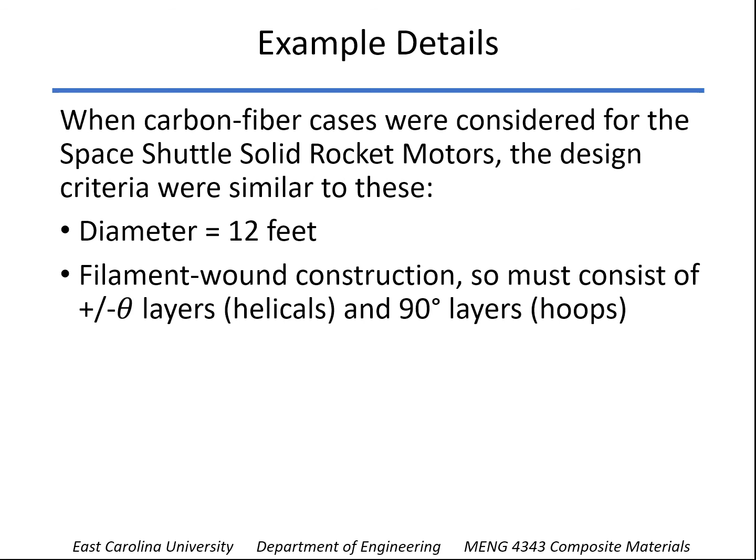The operating internal pressure was about 1,000 psi. Each one of the motors generated a thrust of 3 million pounds. We'll see how that plays into our design requirements in just a minute.

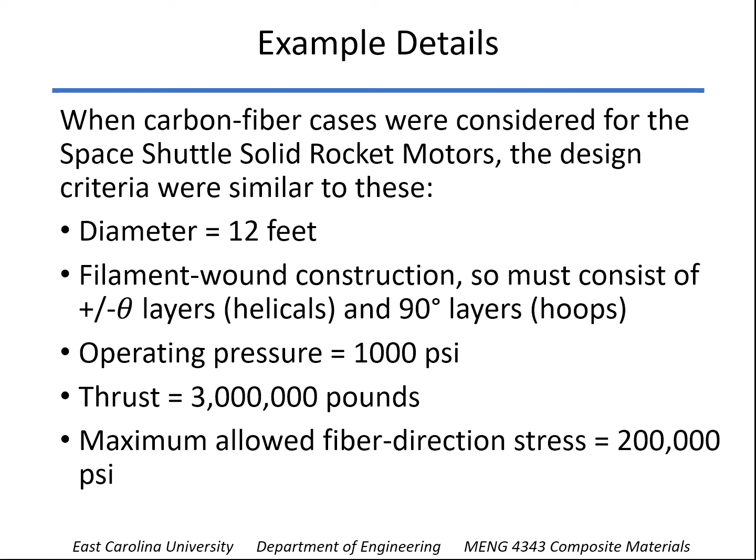And we used a maximum stress criterion, so the maximum stress in the fiber direction, that is sigma 1, was limited to 200,000 psi. That was the strength downgraded by a factor of safety of 1.4. Aerospace products tend to have a much lower factor of safety than most industrial products because you can do a lot of testing and verification.

So over the 125-foot length between the connection points, the steel cases grew about 0.6 of an inch, and that was to be matched with the carbon epoxy case so that it didn't have to totally redesign the connection methods.

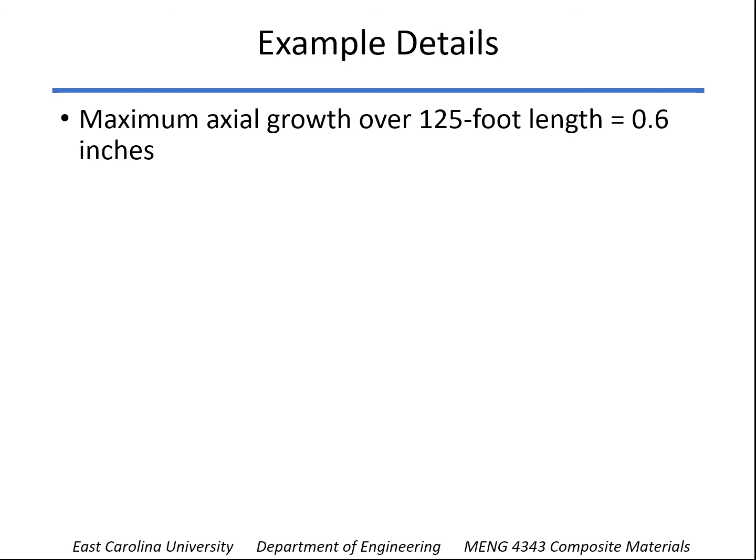And there was a minimum value of stiffness, stiffness being the modulus in the axial direction times thickness. 10 million pounds per inch was the requirement for that. That's like a spring stiffness, and so the idea was that you wanted the response of the case to be similar to that of the steel case, such that the impact on the total system was really negligible.

So we've got a little video we can go to here. And have to go back to this one.

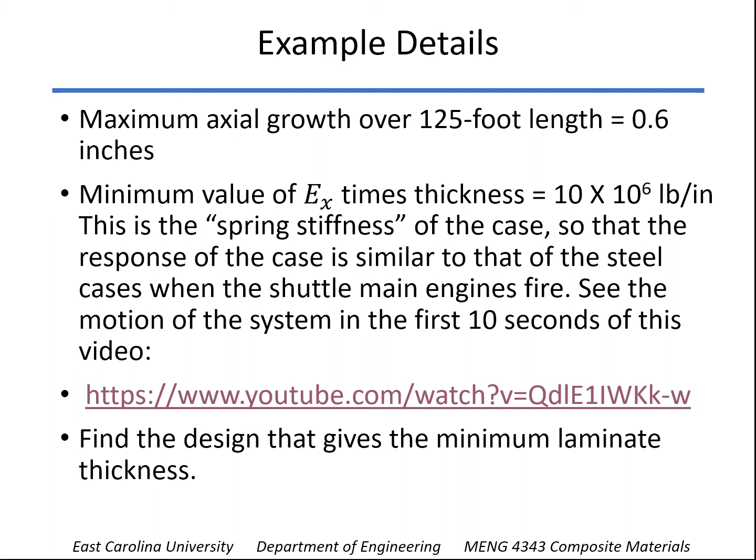Okay, so what we're trying to do, of course, is to minimize the weight, therefore find the minimum laminate thickness. All right, so as we said, the diameter was 12 feet, so radius of 6 feet or 72 inches.

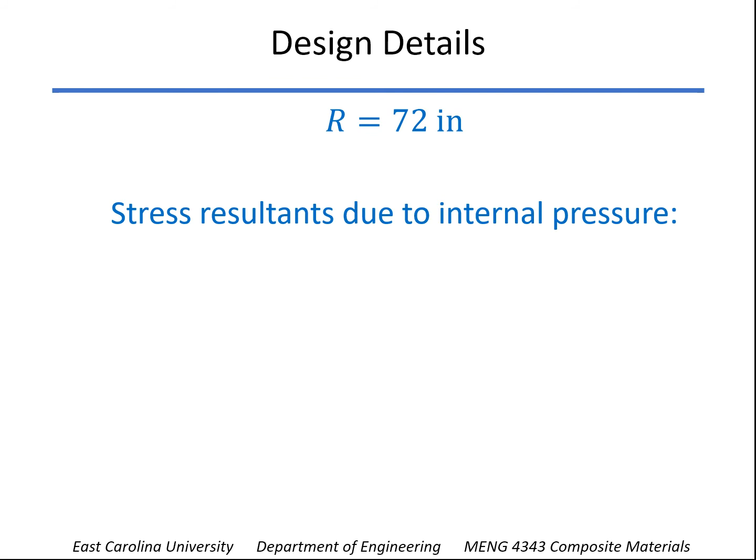And we earlier found out how to find the stress resultants of a cylindrical pressure vessel, PR in the hoop direction, and PR over 2 in the axial direction.

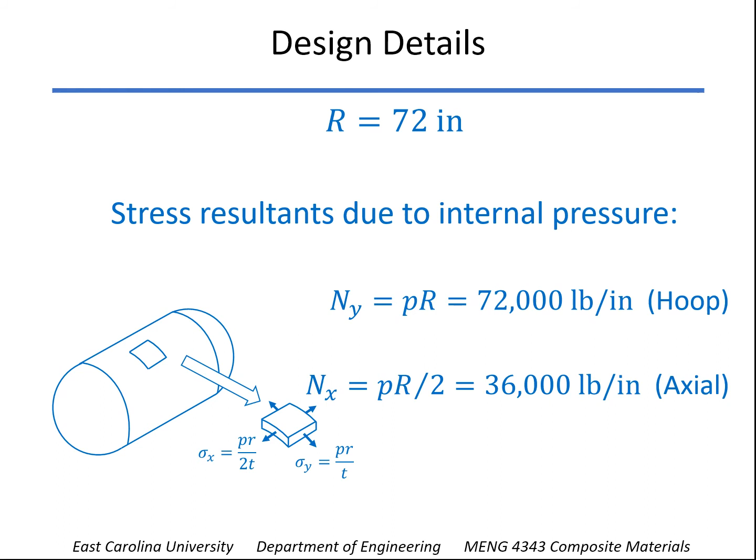And so if we take that compressive load of 3 million pounds and divide it by the circumference of the case wall, pi times the diameter, it ends up being 6,600 pounds per inch compressive. That gets added to the tensile load due to pressure, and so we come up with a total axial stress resultant of 29,000 and some pounds per inch.

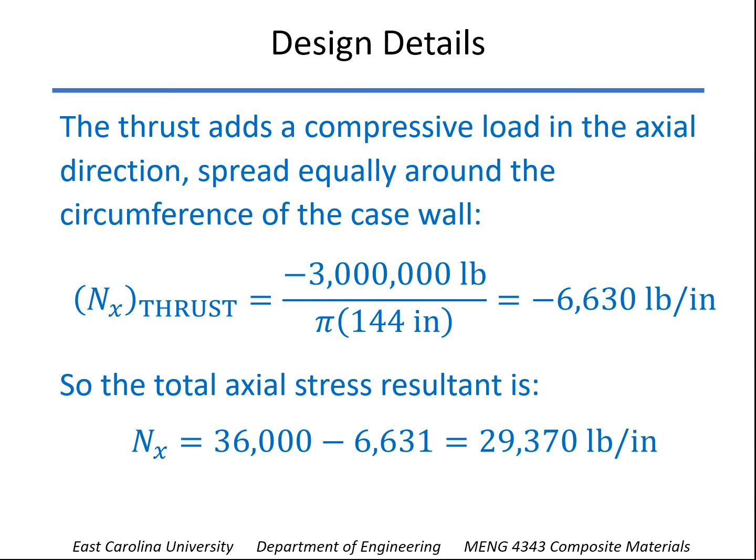Now we also look at the axial growth requirement and just say, well, if we take the total length between the two connection points and look at the allowable change in length, that gives us a strain of 0.0004, or 0.04% strain.

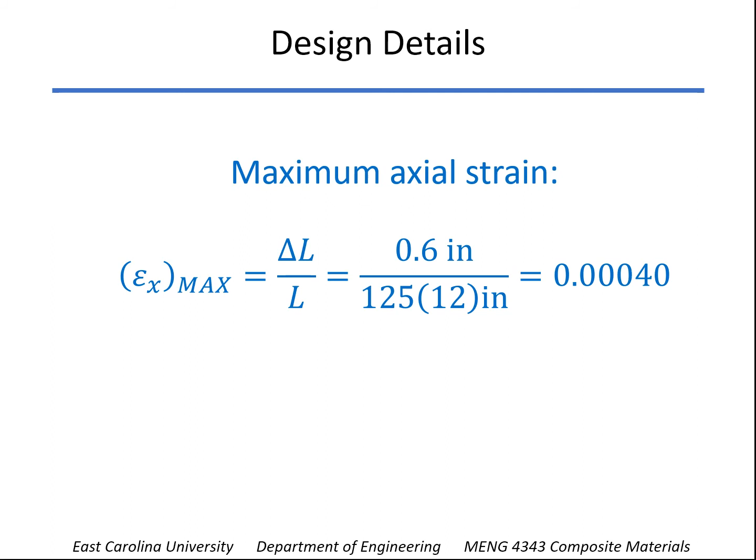And so how are we going to approach this? Well, starting point, you would think that both the axial stiffness and the axial growth would be similar requirements. That is, if I can get high stiffness in the axial direction, that ought to be the best design.

Now, winding is hard to do at angles less than about 10 degrees, so let's try that. Let's try theta being 10 degrees. And so what we're going to do in Solver is we're going to try to minimize the total thickness.

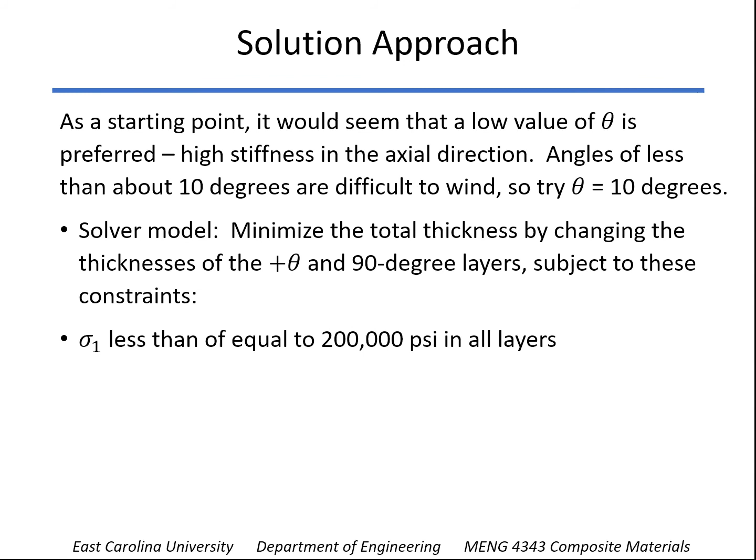We're going to change two thicknesses, that is the plus theta and the 90-degree layers, making sure that the fiber direction stress is less than or equal to 200,000 psi in all the layers. The total axial strain less than 0.0004, and our stiffness value greater than or equal to 10 million pounds per inch.

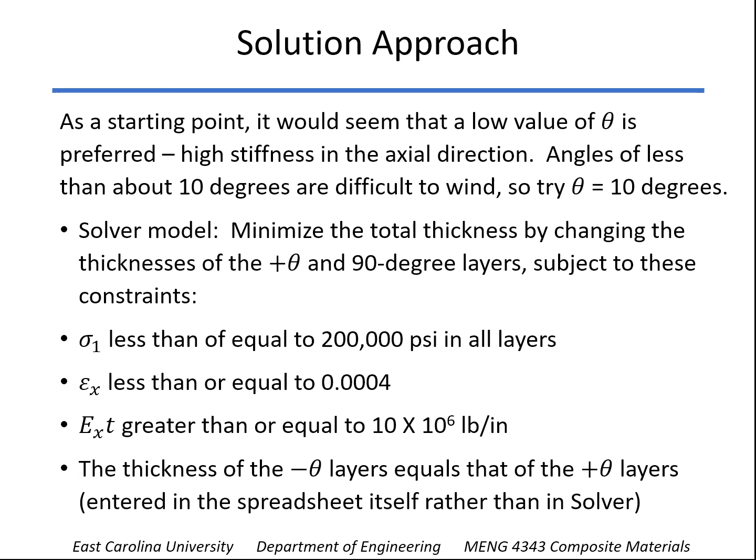Now, one thing we'll put in the spreadsheet is that, again, it has to be a balanced laminate, so the thickness of the minus theta layer has to equal the thickness of the plus theta layer. In other words, our 10 and minus 10 here. And let's set that up in Solver.

Okay, so I've just arbitrarily put in a half inch across here. I want to make sure that this thickness is equal to that one, because these are going to be the two that we're going to change, the plus 10 and the 90s. Here's our loading shown here, n sub x and n sub y.

Now what I've done is made a couple of cells over here. This is the axial modulus times the thickness. That's the number that has to be greater than or equal to 10 million. So you can see this design's way over that. But this axial strain, I've just copied from where we've calculated the strain down here. That has to be less than 0.0004. So the design that I've got here is not going to work.

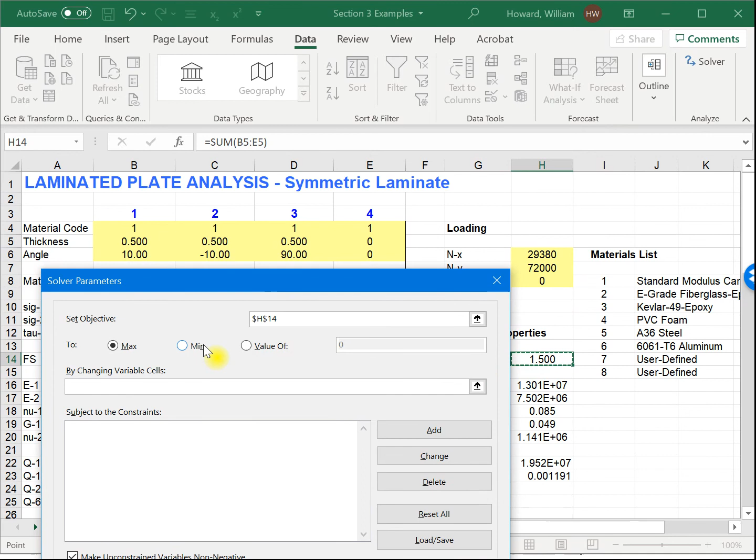Let's set this up in Solver. Remember, this is what I'm going to minimize, this total thickness. I'm going to change the thickness of the plus 10s and the thickness of the 90s. And I have some constraints.

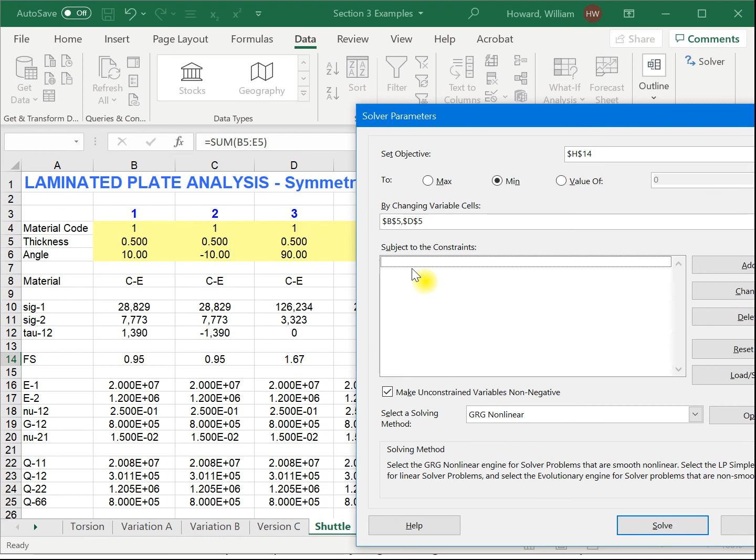Sigma 1 for all three layers, and again, ignore layer 4, it's got a 0 thickness on it here. This has to be less than 200,000 psi. Another constraint is that this axial stiffness value has to be greater than or equal to 10 million. And finally, this axial strain has to be less than or equal to 0.0004. Click OK, and let's try to solve.

And you see what we come up with is a thickness of over 2 inches. You can see that we just hit the strain here, but we're way over designed as far as the axial stiffness goes. So the strain seems to be the driving factor here, the critical factor.

Okay, so again, there's that with theta being 10 degrees. And also we found that the stresses in the plus and minus 10 are relatively low. The 90s are at their limit of 200,000 psi. So again, axial growth appears to be critical.

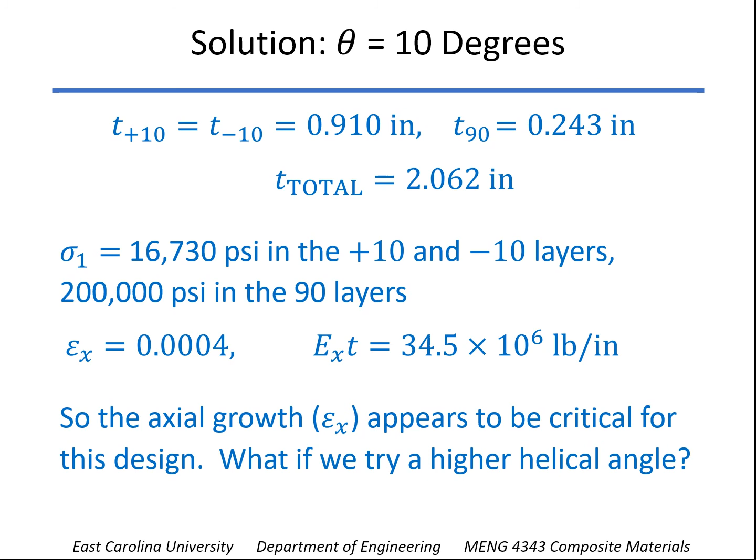Now, what if we just try a higher helical angle? That doesn't seem logical necessarily, because you've got two things in the axial direction, stiffness and growth. But let's try it anyway. So we're going to switch to 30 degrees. I'm just going to change the 10 to 30. And again, we've got plus and minus 30 here. All the constraints are the same, so we can just run it again.

Oh, look what we come up with, a little over 1 inch thickness. So definitely a better design here. Let's go back and again summarize that design.

Looking at the stresses, nothing significant there, but notice that the axial strain here is actually negative in this case. So with 30 degrees, the stiffness became critical, and not the axial growth.

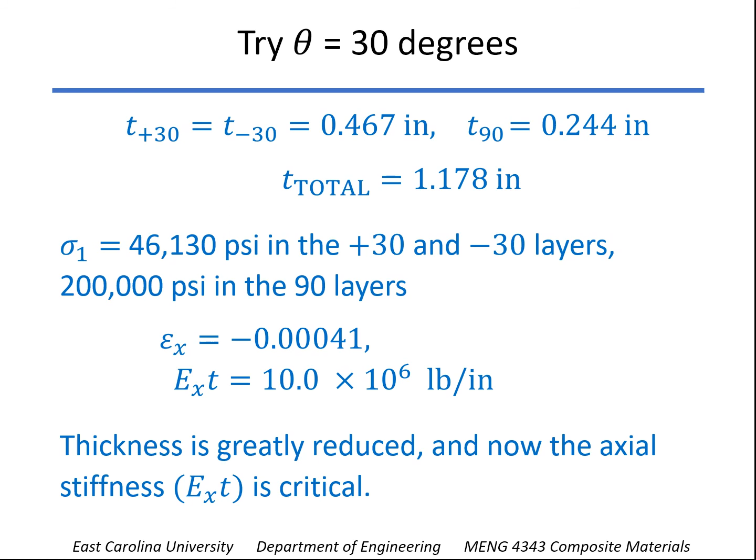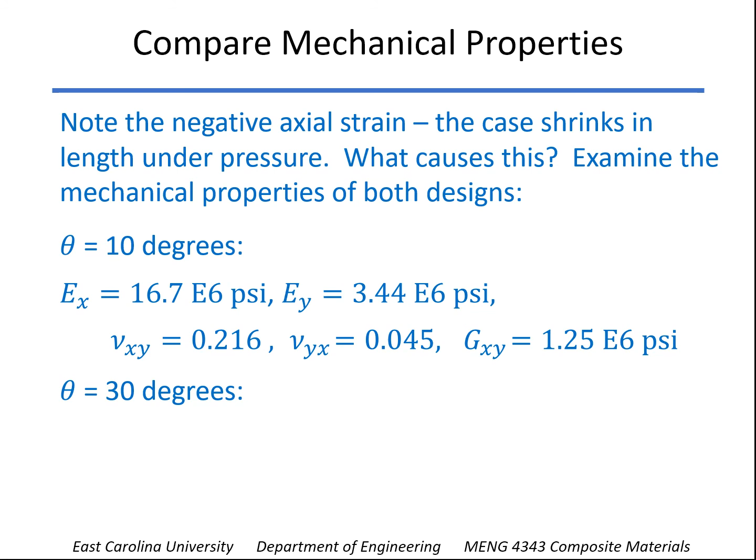So before we look at trying to optimize and say, well, what's the best angle, let's take a look at the mechanical properties of both the plus minus 10 and plus minus 30 designs we've come up with. Here we go for the plus minus 10. Here we go for the plus and minus 30 degree. And the key is this value right here, the Poisson's ratio yx.

So when you have the higher angles, you get a Poisson's ratio that's greater, and what that causes is that as the case stretches in the hoop direction, it causes contraction in the axial direction, and it's much greater for the 30 degree than it is for the 10 degree.

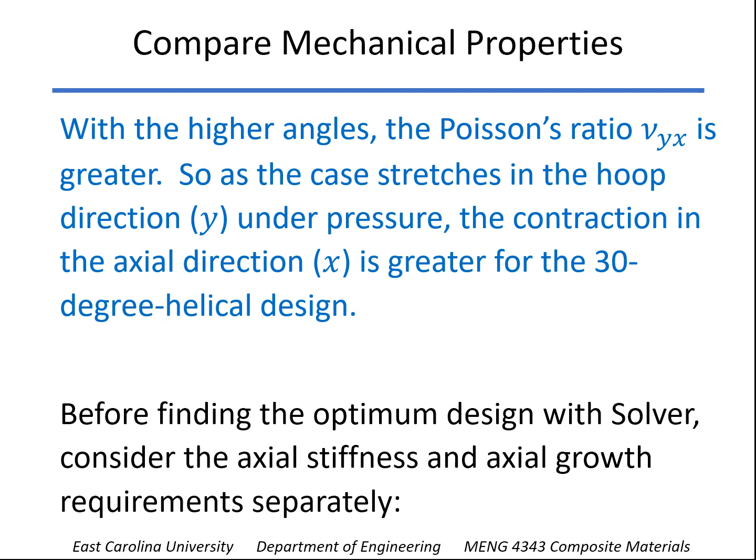And we can look at the optimum angle here in just a moment, but first let's just look and see if we look at the axial stiffness and axial growth requirements separately instead of at the same time. You can see if we design for axial stiffness, obviously the lightest weight case we're going to have is as close as we can get to a helical angle of 0, and as we increase the angle, the stiffness goes down, so the required thickness goes way up.

But when we look at the requirement for axial strain, just the opposite. You can see at 10 degrees we had to be over 2 inches, but at 30 degrees then the axial stiffness becomes critical, and so our design had to be up there. So the best design was where those two cross. At about 27 degrees, that's going to be the optimum angle. It's going to be a little over 1 inch.

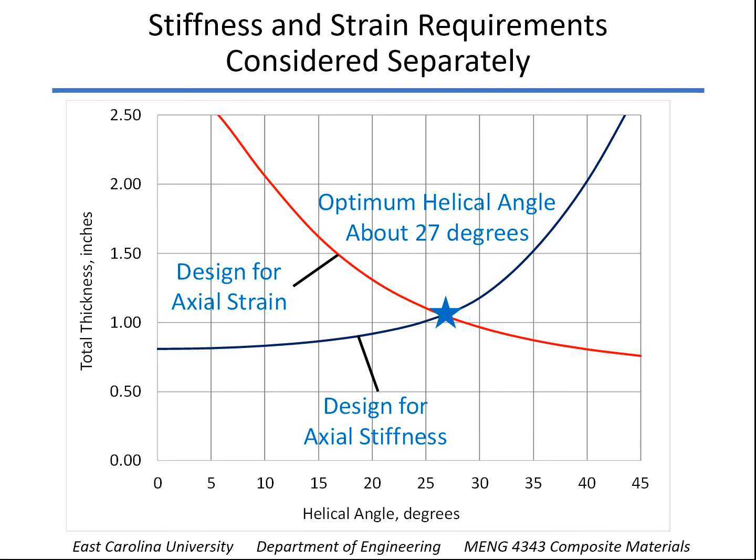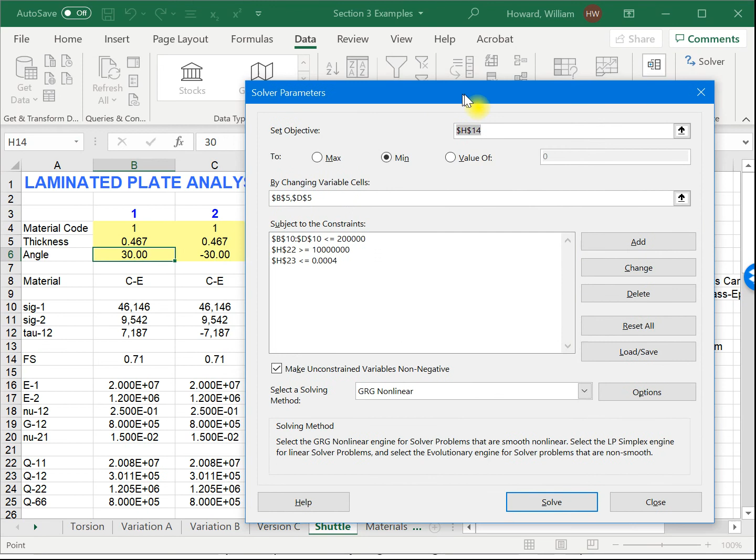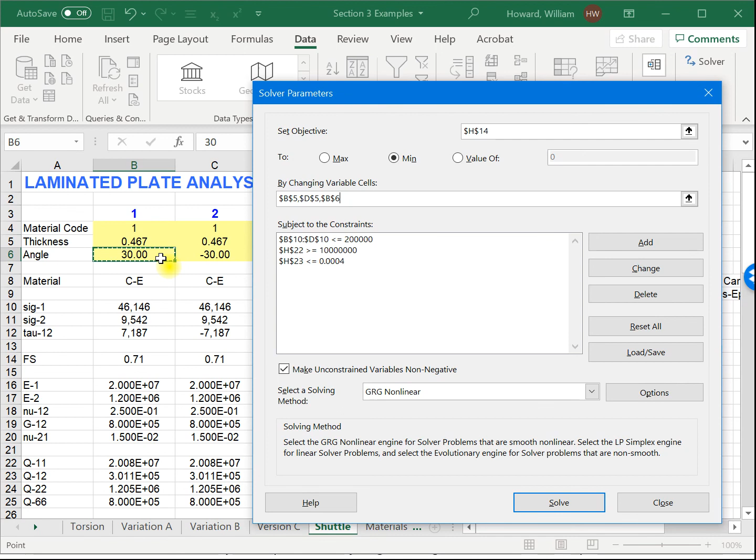So back to the spreadsheet. Really all we have to do now, and remember this cell is set to be the negative of that cell, so all we have to change in Solver is allow one more variable. We're going to let both the thickness of the plus theta, the thickness of the 90, and the angle theta itself to vary.

And we come up with an optimum angle of about 26.6 degrees. And now you can see we're just slightly over 1 inch thickness.

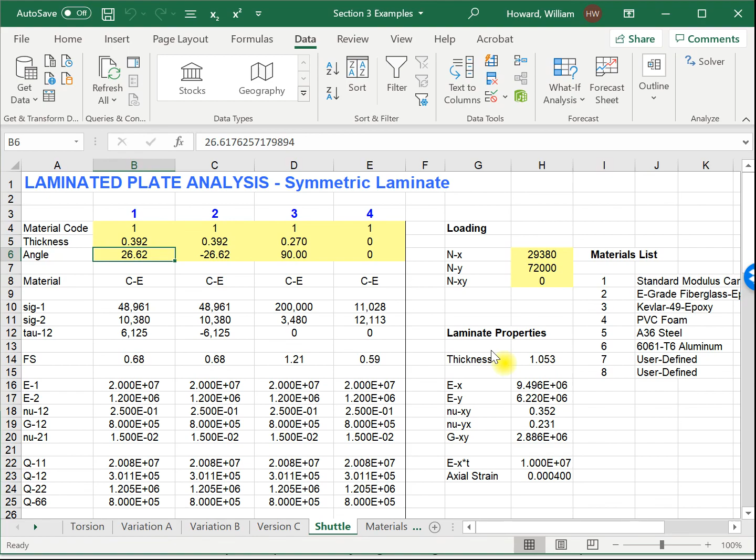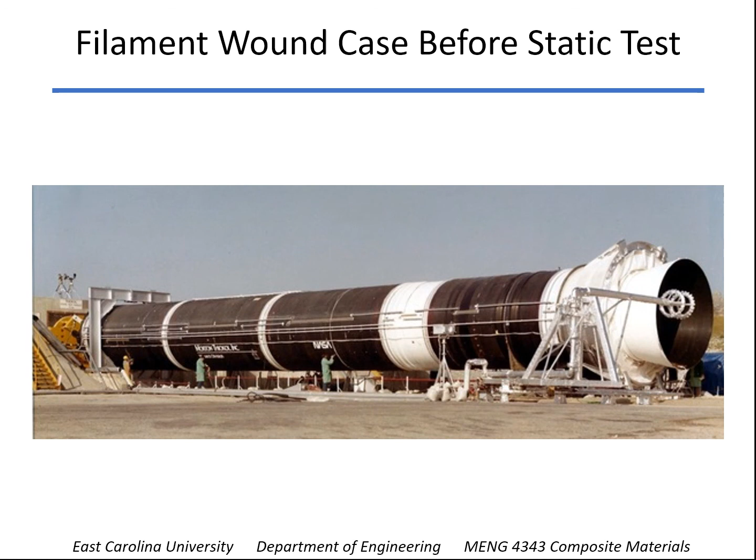All right, so next time we'll look at failure criteria.